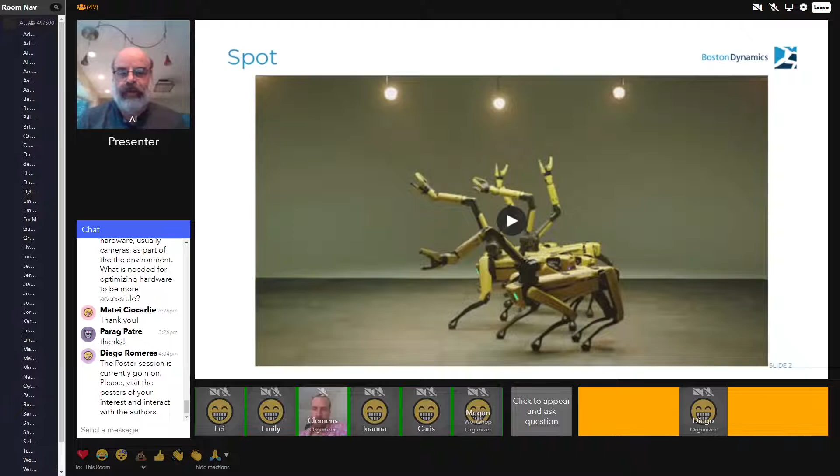At the core, we really see this as a way to deliver the hands, the part of a complete system that's going to actually touch the world. What I'm going to talk about is our approach to building a set of low-level capabilities and functions that we think are really going to enable that.

But since I work at Boston Dynamics, I have to start with a proper video. Hopefully you guys all get audio for this.

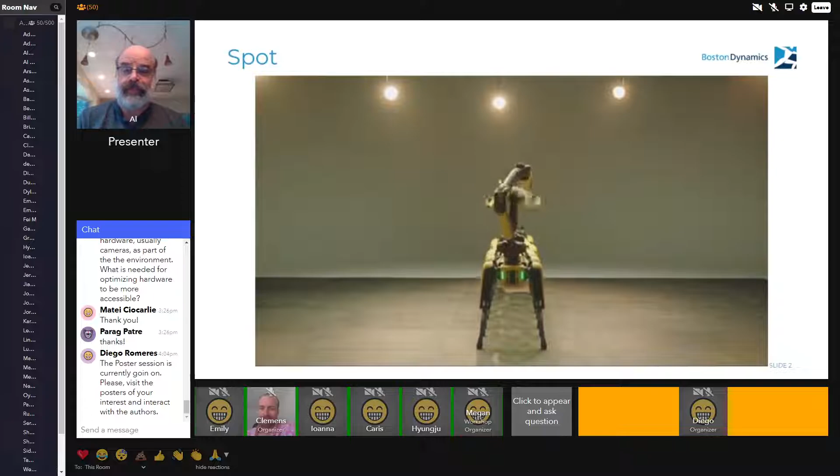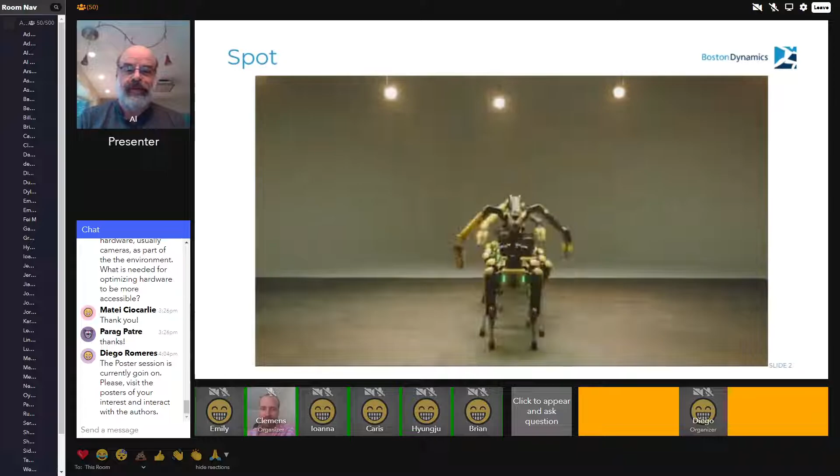This is a set of Spot robots performing a bit of choreographed dance that we put together as part of our announcement for closing our deal with Hyundai.

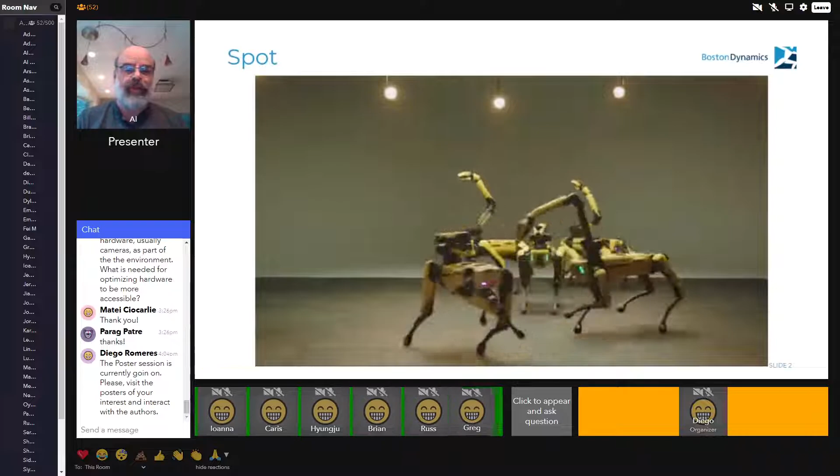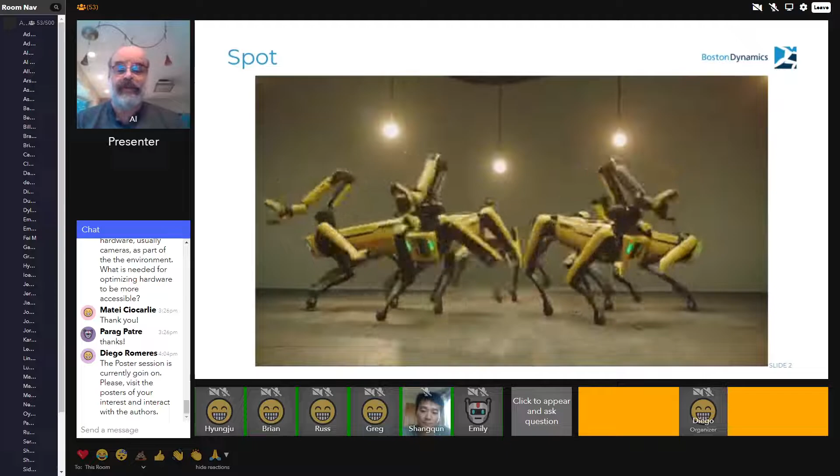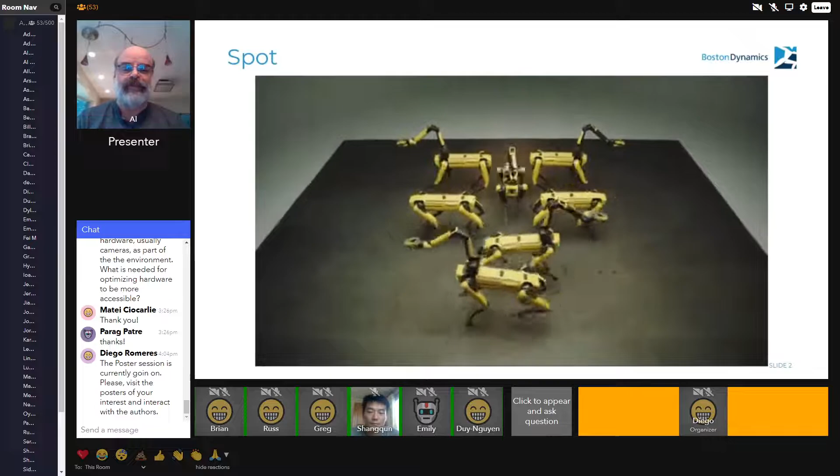Just a few behind-the-scenes notes. In most of these sequences, there are either 5 or 7 robots, most with arms. They're doing a choreographed dance, but they're not really coordinating with one another. They're all watching a wall clock and playing out a prescribed dance sequence against that clock. I think the remarkable thing about this is, of course, the agility of the machines and the fact that we can actually put something like this together over the course of about a week or two's worth of effort. Most of that effort wasn't actually engineering effort. Most of it was choreography and some art associated with how you actually make these robots be expressive and communicate something.

All right, so mobile manipulation, back to the real world. We really want to enable robots in general, and Spot in particular, to reach out and touch and interact with the world. We think the way to do that is really through what we would describe as supervised local autonomy. Sometimes we use the phrase athletic intelligence.

It's really similar to how we make mobility, for the most part, just work on the robot. If you've ever used or seen one of our robots in a demo, you'll realize the robot takes care of a lot of the low-level details associated with how it gets around in the world. It's constantly choosing where to place its feet, how to maintain balance, all of the details that make locomotion relatively difficult. As an operator, you simply tell the robot, hey, go in that general direction, go about this fast.

Sometimes you pass hints to it. We have a hint that we like our users to pass to the robot whenever it's going to go climb up or down a flight of stairs. It doesn't really matter whether it's explicitly a user passing that hint or some other client-side control system or AI system that's driving the robot. Really, what we're trying to do is very similar things for manipulation.

So our initial focus is really on what we would call supervised teleoperation and an API that supports that. We're really trying to support low bandwidth manual remote operation of the robot. We're trying to support experimentation by both researchers and industrial users who are looking at how they might take advantage of mobile manipulation on a legged platform. And we're building an API that allows third parties to build applications around all of those capabilities.

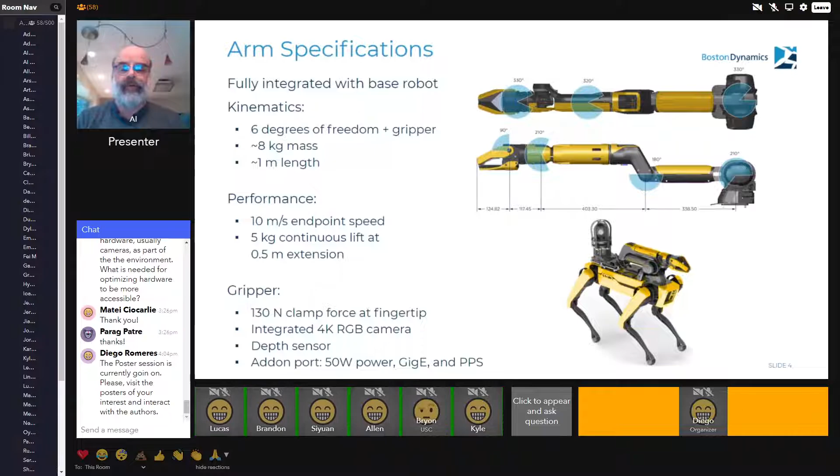So we can deliver about 50 watts of power. We bring our Ethernet network that runs inside the robot out there, as well as a timing signal.

What I'm really going to talk about today are the behaviors that we're paying attention to and trying to deliver along with this. So there's integrated behaviors for grasping, semi-autonomous object manipulation. This is for doing things like turning valves, opening and closing valves, turning switches, flipping levers. You may have seen videos of us opening doors. We're delivering that as integrated behavior on the robot.

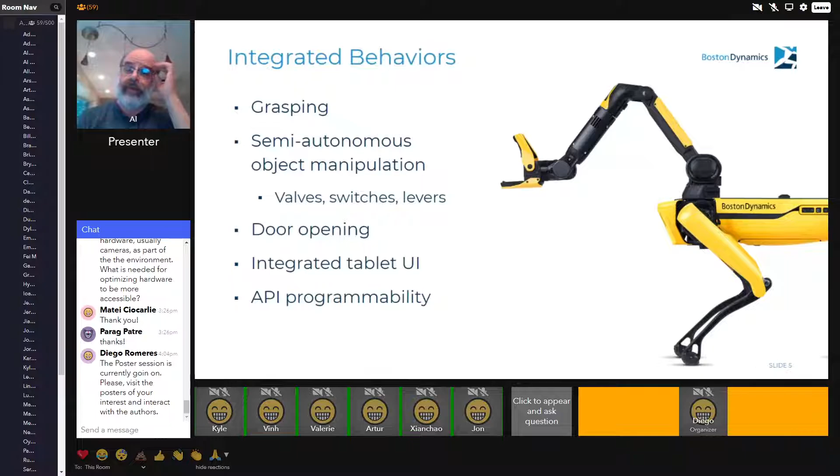We have an integrated tablet UI that gives a user or developer access to all of these functions, but all of those functions that we expose over that UI are also available over an API that we make available to anybody using the robot, to really encourage them to develop their own off-board autonomy systems, planning systems, and higher level applications. So there's nothing you'll see us do through the tablet UI that isn't already accessible. So let's watch a video of the robot doing what we think of as a day in the life kind of scene.

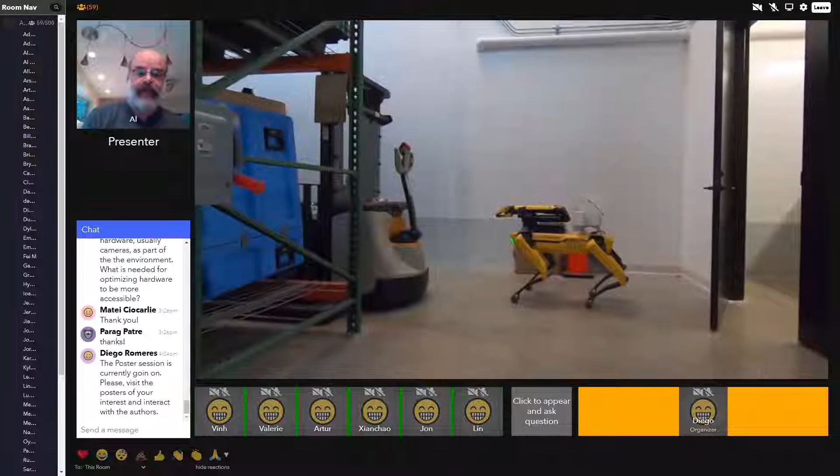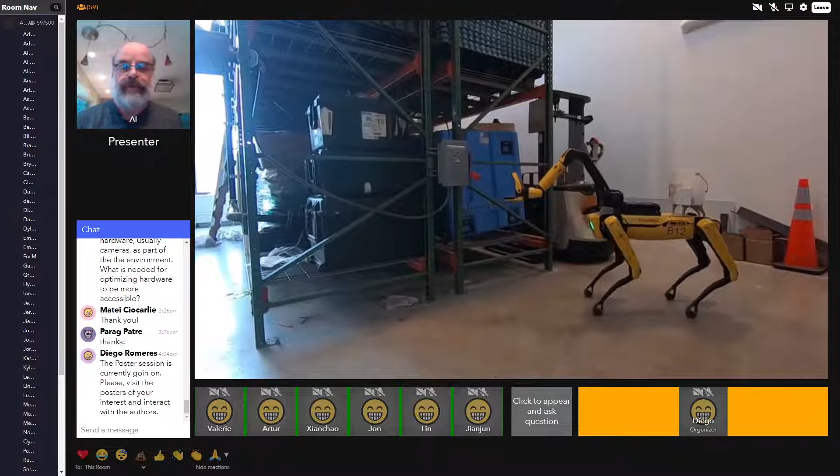So the robot opens a door, walks through the door, goes over to this electrical box. The user says, 'Hey, I want to grasp.' So they orient the robot so it can see the thing they want to grasp. They make a tap on the tablet to get the robot to grasp the handle. They say, 'Hey, I want to turn that switch knob.' Again, a relatively simple interaction — they can tell the robot to actually flip the switch on and turn on the lights.

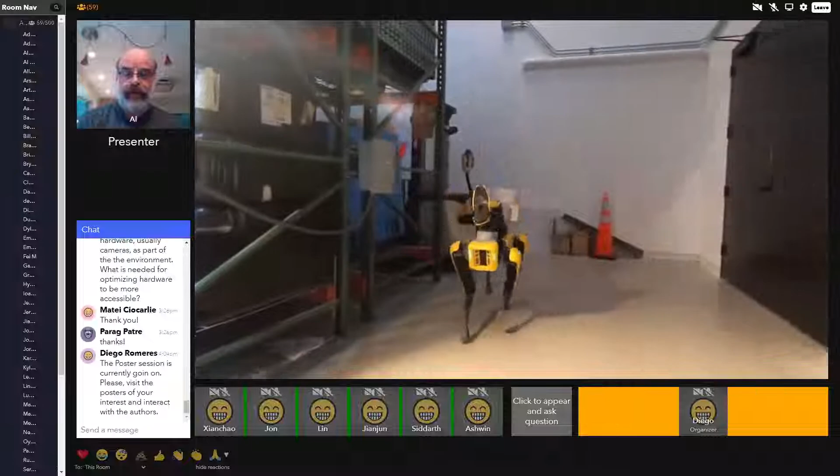We'll then switch to using some off-robot compute to do a trash cleaning task. Here there's an off-robot classification system that's been trained to recognize junk on the floor. That's actually driving the robot to cause it to pick that object up and deposit it back in the bucket. Once that's done, the user takes over control again.

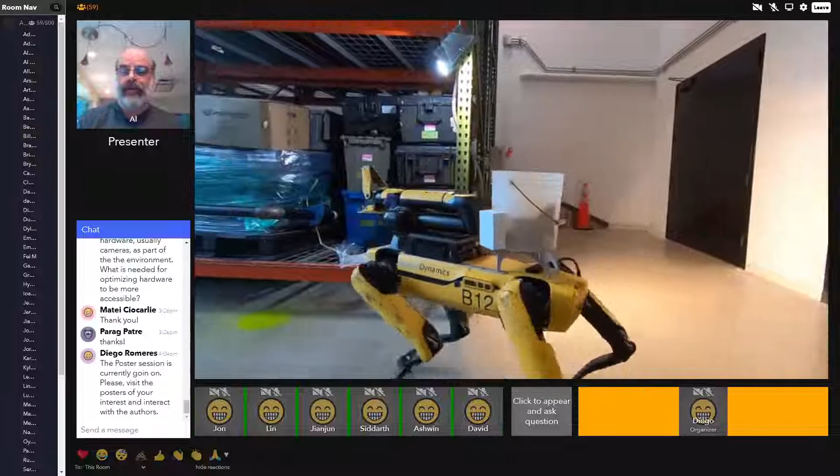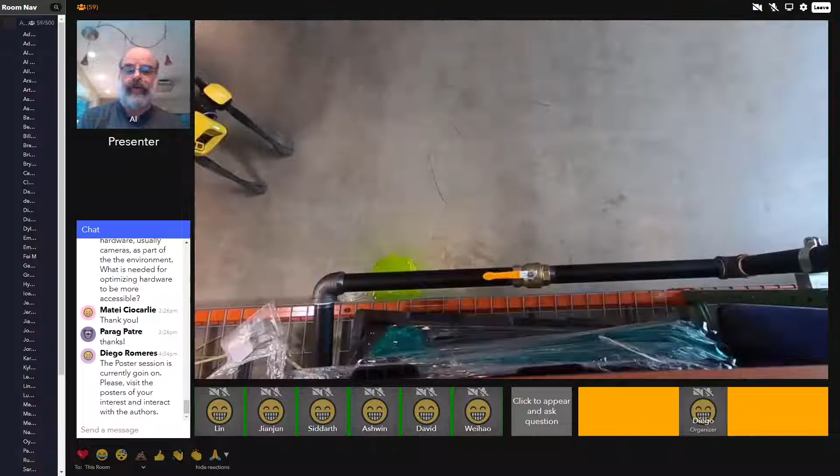We see the dripping green goo coming out of the pipe. You can actually use the camera in the gripper to go inspect that, and then walk the robot over to this quarter turn ball valve. Again, using the same grasping primitives, this time using a slightly different version of that tooling, we go tap on the place we want to grasp. In this version, the user is presented with an opportunity to specify a bunch of grasp constraints. Once they get them specified, they can either manually or automatically have the robot execute that grasp. And again, we use this constrained manipulation to go turn the valve and stop the leak — save the world, make everything great for humanity, because hey, that's what robots are supposed to do.

All right, so what I really want to do is go through that video in careful detail and talk about each of the behaviors that you saw in it and how we do them.

The very most basic thing you saw there was this supervised grasping capability. This really allows the client to specify grasp constraints. You saw us take advantage of some imagery coming off of the camera, as well as a few renderings of the pose of the robot, to allow a user to fully specify exactly how they wanted to grasp an object.

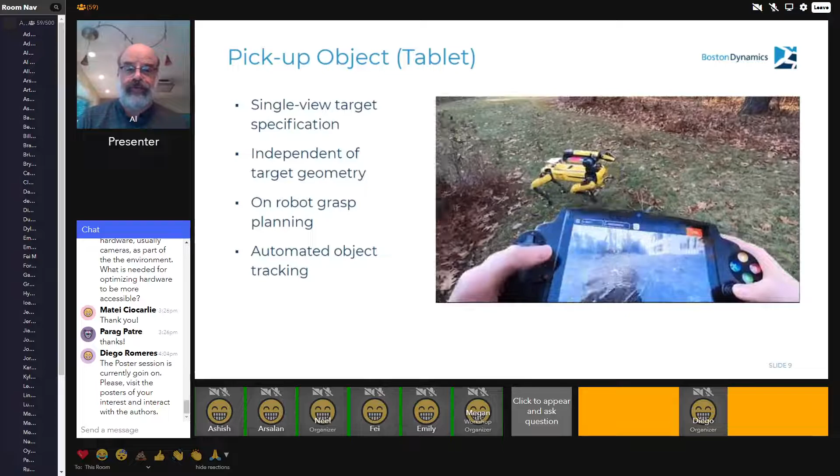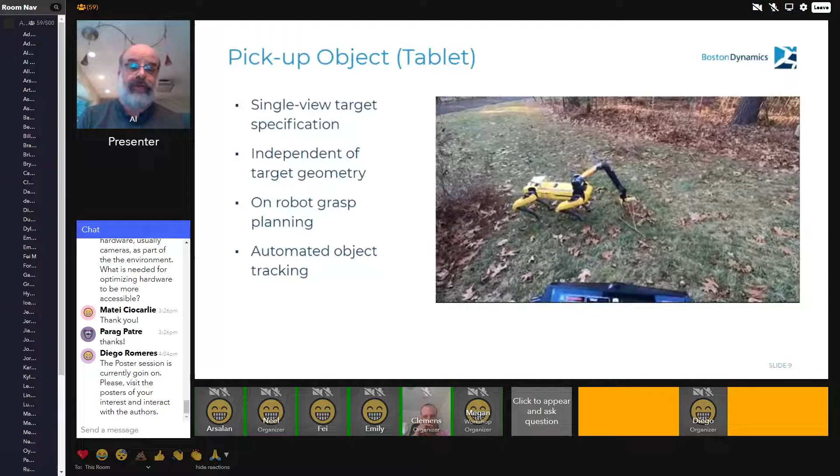Here's just a demonstration of the robot picking up a bunch of random objects in one of our engineers' yards during COVID times. You tap on the object, say I don't care what orientation you grab it from, and it'll go grab this stick. The robot has never been trained or explicitly programmed to pick up and carry sticks, but hey, we can tidy up the yard.

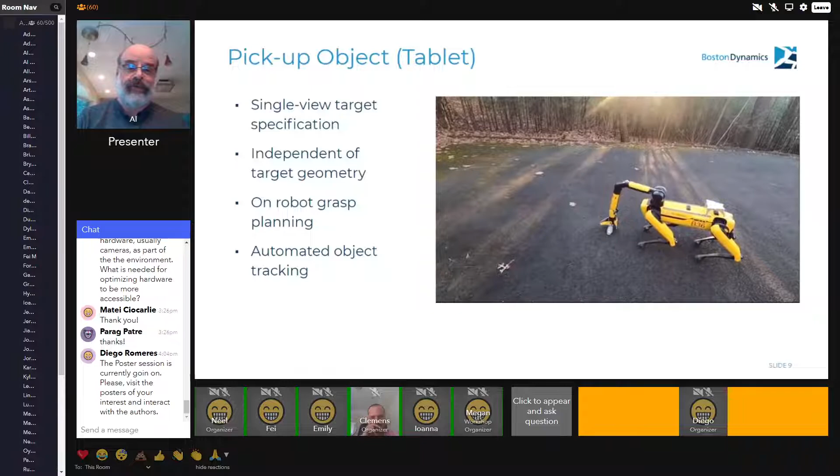We can also pick up trash off of the driveway—obviously a slightly simpler situation to successfully pick up the water bottle. We can pick up the random pipe fitting and shoes that you may leave lying around.

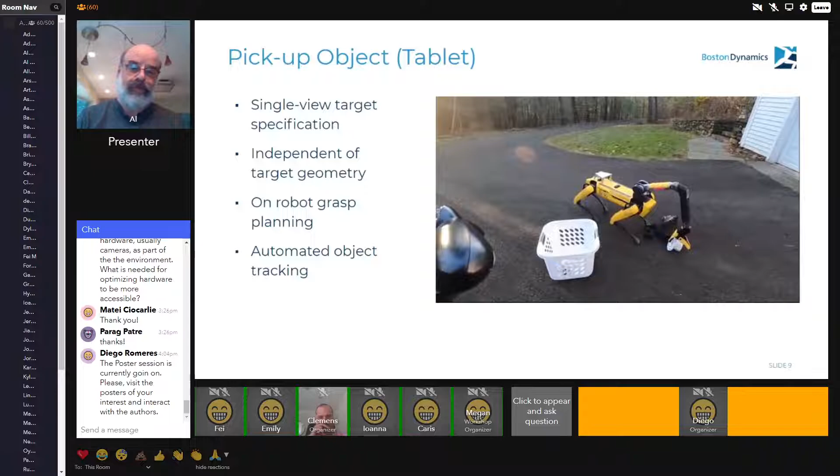Again, you see the robot making decisions about the best way to grasp these objects. For that particular fitting, it chose to grab the flange. For the shoes, it tends to grab them across the toe box.

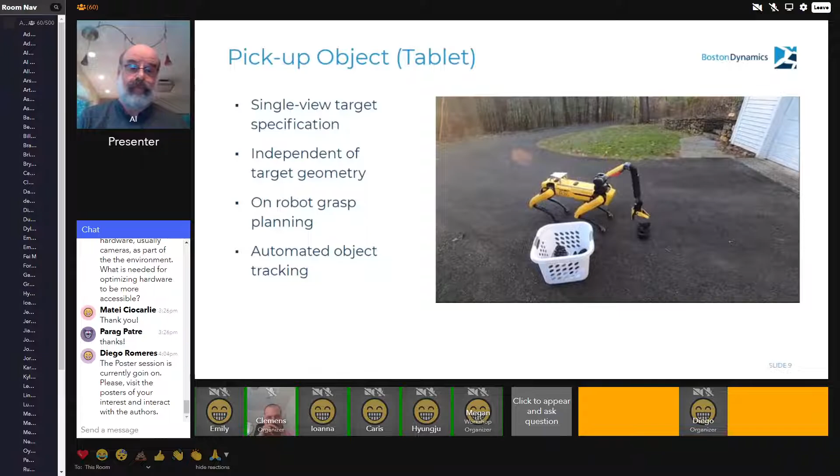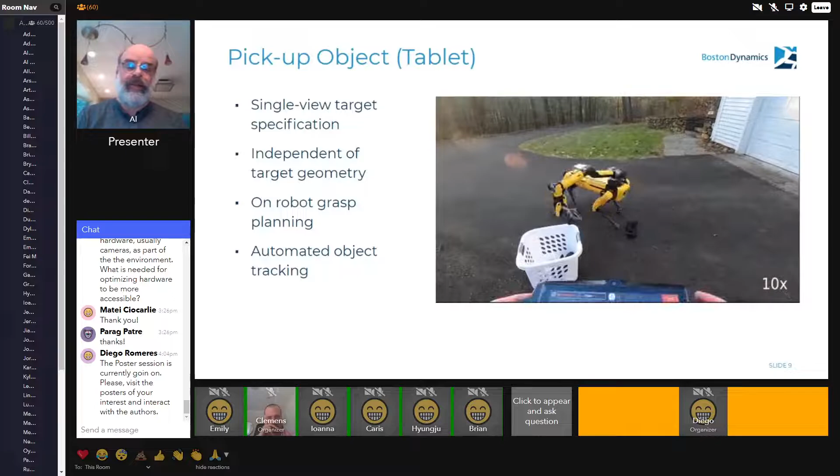I think the point here is making these low-level capabilities as reliable as possible, in order to make it viable to automatically interact with a large number of objects in a reliable way, and to essentially alleviate the burden of needing to explicitly plan detailed kinematics and motions in order to accomplish these kinds of tasks.

Same thing for the grasping wizard. This obviously gives us much more control over the specific geometry of the interaction. So again, you tap on the image, the robot looks at the depth data it has, goes and figures out how to point the in-hand camera at that target. You can then control the orientation of the gripper with respect to that target, essentially specifying an approach angle. I'm going to play that again because it goes kind of fast.

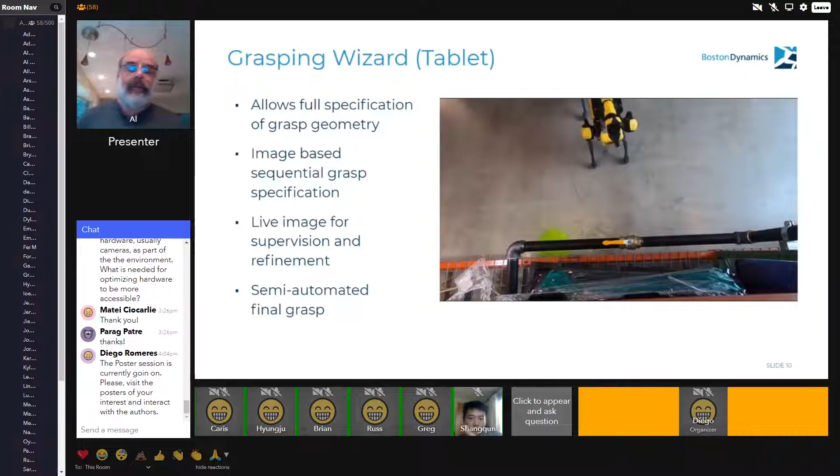So you can specify an approach angle, and then once that's specified, we present a little bit of information about the measured depth to target. So once we get the gripper lined up and say, yeah, go ahead, you see this vertical image that includes a white mark, which is where the robot has measured the target object to be at. And if you choose to automatically grasp it, the robot will just close on that and secure the gripper around it. You can also perform that step manually.

And by manually, really what it means is you can pass velocity commands to the robot saying, please go close at this rate. And then once you're happy, you can tell it to stop closing and secure the grasp.

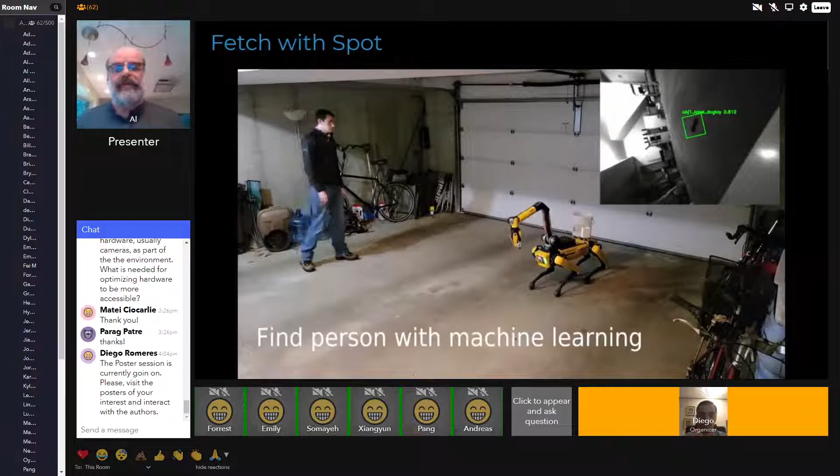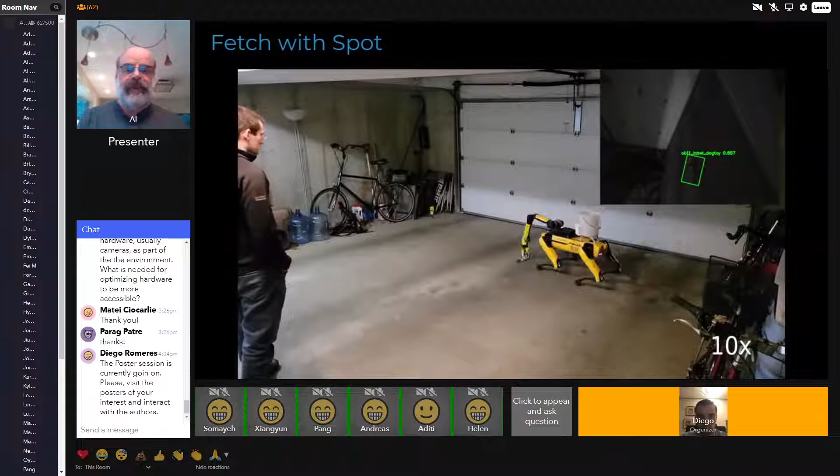So this is an off-robot script connected to a machine learning system that's allowing the robot to play fetch with Andy Barry. The robot is using a classifier to go find this dog toy on the floor. Once it finds the dog toy and picks it up, it looks around and it finds his legs and it goes over and walks in front of him. We always stay 2 meters away from people, so the robot stops relatively far away from him, drops the toy, and you repeat.

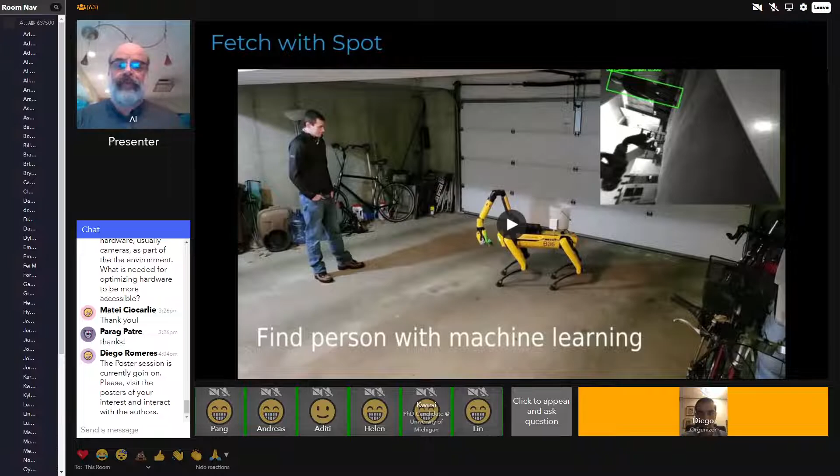Point is, something like this is relatively easy to build. This is something that got built over the course of, I think it was 2 half days over a couple weeks by like 2 engineers using all of the tooling that we have in place and available. So I'm going to stop there. I think I'm just about on schedule.

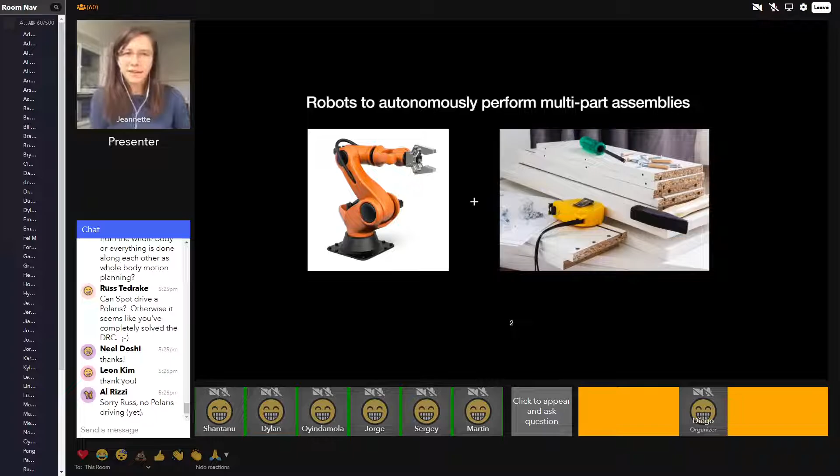And the main challenge towards this goal is finding robust methods for sensory motor control under uncertainty. And uncertainty can be caused by many different things. So, for example, by any kind of inaccurate perceptions, such as due to the inherent noise in robot sensors. Uncertainty can also be caused by imperfect control, such as due to limitation in the frequency with which we can send control commands to the robot, or whatever makes a robot not the greatest.

And uncertainty can also be caused by manufacturing inaccuracies in an assembly due to the tolerances with which they were made. So I think we can safely say we always expect there to be some failures. And the question we ask in this particular work is how we can overcome them. And so the key insight that we explored in this work was if a robot can learn from failed physical interactions with an object and actually use that knowledge to recover from it.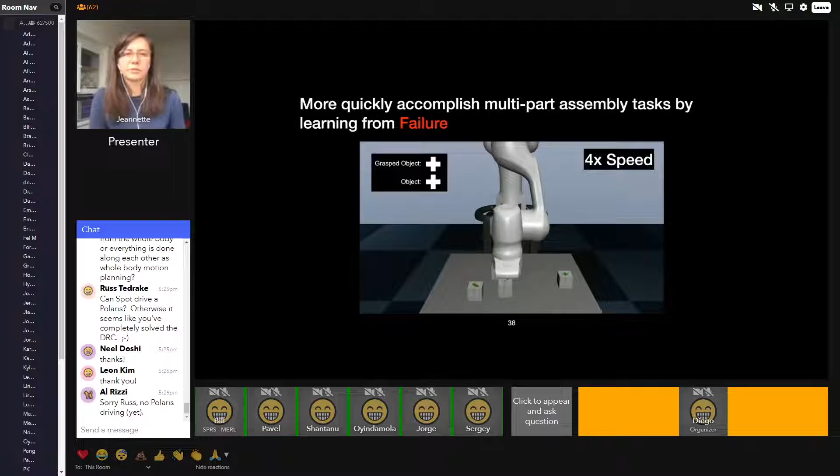Right, so this was work that was actually published at ICRA, and we weren't able to yet put it on a real robot setup, so we hope we're going to be able to do that in the future now that we can go back to the lab. And we are also interested in investigating tasks where you have more in-hand pose uncertainty and where the objects' positions are maybe not fixed in the environment, or where the configurations are actually more complex.

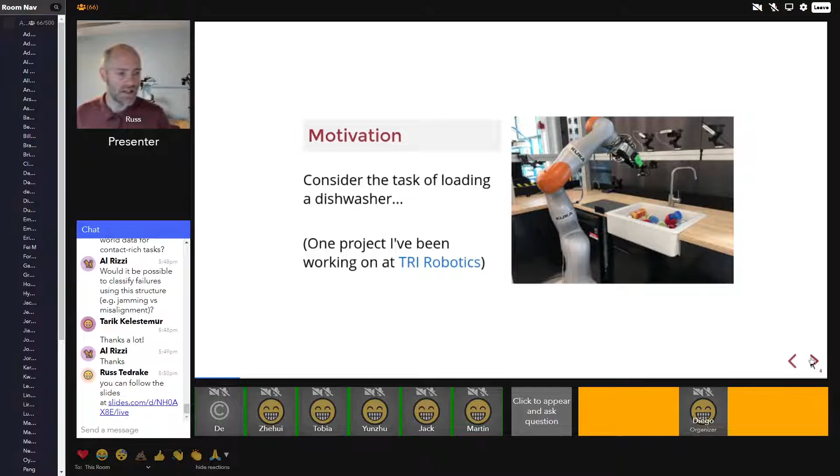Okay, so here's a risk-based framework for manipulation, and let me set that up with an example I've been using for a few years, just to set the stage and context here. We've been playing with a robot that could load the dishwasher at TRI. The basic setup is someone like Siwan will dump a bunch of random stuff in the sink.

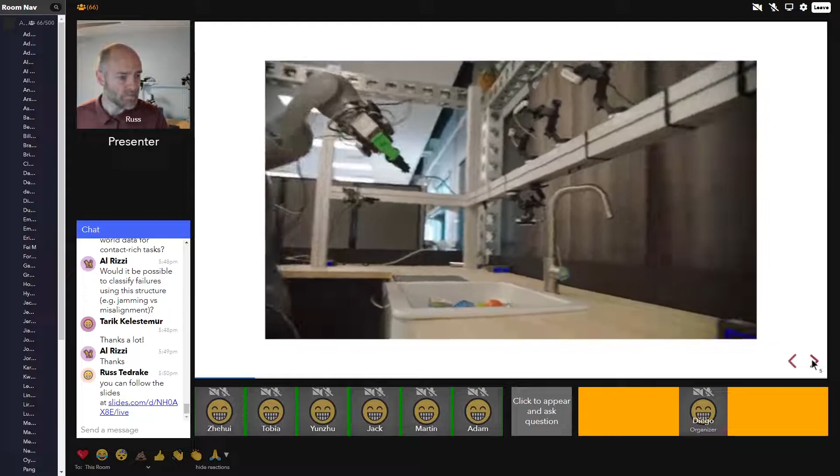The robot is using cameras, it's completely autonomous in this case. It's going to use its cameras, perceive the sink, open the dishwasher, and do, I would say, a highly non-trivial manipulation task.

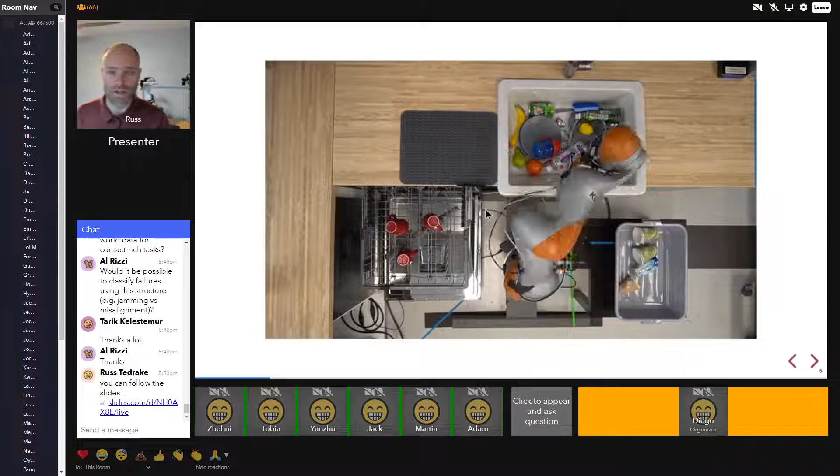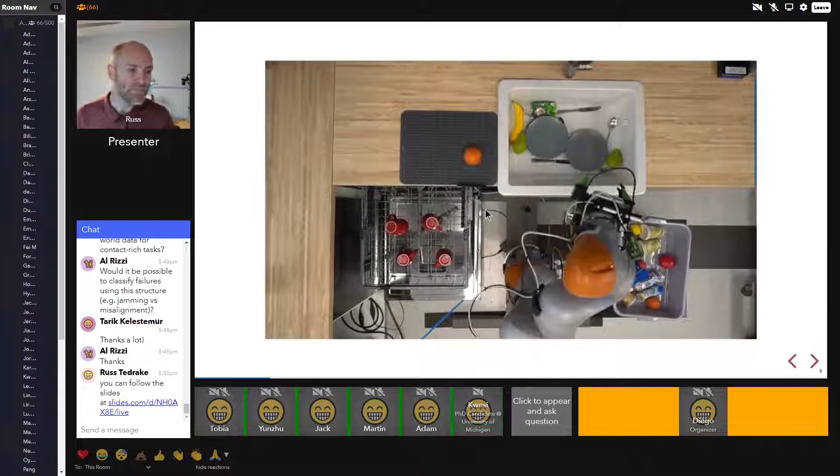And we run these robots over and over and over again all day long. We use it to understand this fundamental question of trying to understand how do we certify manipulation, or at least establish confidence in manipulation that uses machine learning in the pipeline. This was a long-running experiment that, like I said, we learned a lot from.

One of the big stories is how amazing it is that the field has transformed in the last few years, that we could actually do most of our testing in simulation. We would hammer on this in simulation with extensive Monte Carlo testing, and really felt like most of the problems we saw in the real robot we could find in simulation with extensive batch simulation on the cloud.

That included some fairly subtle bugs that were turned up with Monte Carlo testing. My favorite one was this example where we had a certain model for the perception system on the dish rack, where the dish rack had some variability in its pose estimation. There was a logic bug that went through our high-level task planner, our motion planner, our perception system in a very subtle way, where if the robot started moving when it thought the dish rack was in one location and it moved by some amount within the noise threshold before it finished moving, it could get itself effectively in an infinite loop. That was the moment for me where it was like, wow, that was a seriously non-trivial bug that we would not have discovered if we hadn't been hammering on this with Monte Carlo testing.

One of the interesting things, which is an important part of the conversation here, is the question of are failures rare in simulation? It turns out we often made the simulation much harder than reality. So we had adversarial dish racks - this was kind of our equivalent of autonomous driving through downtown Tokyo or New Delhi or something like this. The dish rack is always bouncing around like crazy. Because we took this sort of aggressive testing and simulation approach, even when our robot was working very well with very high levels of performance in the real world, we were able to falsify it with relatively weak statistical algorithms, just naive Monte Carlo.